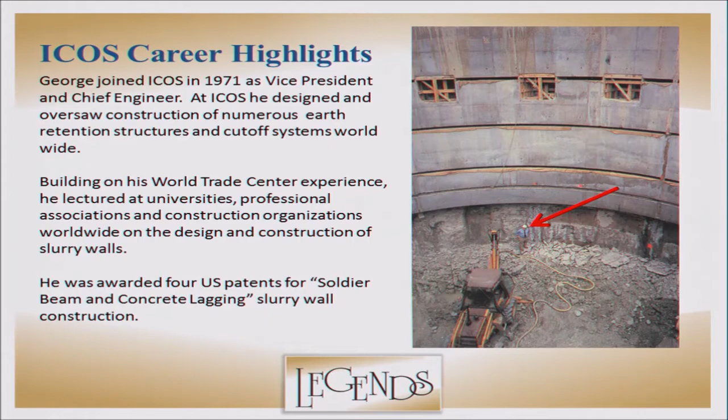Mueser Rutledge Consulting Engineers. George joined Mueser Rutledge Consulting Engineers in 1980 and was elected to the partnership in 1983. He focused his attention on the design and construction of deep foundations and excavations. His first assignment was the design and construction of the 4-building World Financial Center with 2 basements mimicking the World Trade Center bathtub just across the street.

His other projects ranged from Egypt to Frankfurt to Berlin to Mexico City. While his projects ranged all over the world, he will be remembered for his work on the World Trade Center below-grade recovery effort after 9/11.

Achievements that George has attained. He's a registered professional engineer in 16 states, the UK, and Europe. He's elected to the National Academy of Engineering. He has the Mole's Outstanding Achievement in Construction Award. He's received the DFI Distinguished Service Award, the Golden Beaver Award, the AAES John Fritz Medal. He's an ASCE honorary member. He's gotten the ASCE Opal Award, the ASCE CAP, Peck, Balcom, Friedman, and Howard Awards. No shortage of awards.

George authored or co-authored over 75 works, including a recent revision to the New York City Building Code Foundation section, earlier versions of the Post-Tensioning Institute tieback standards, as well as book chapters on foundation engineering, caissons, and slurry walls. He has appeared on the cover of Ground Engineering and is in an Esquire magazine article. He was fully clothed for the article.

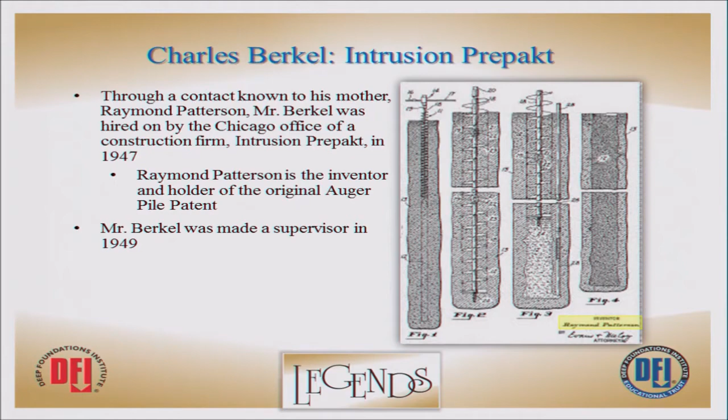At the time, he was working as a junior engineer for the city of Muskegon. That wasn't really what his goal in life was. He was looking for something more than that. His mother knew a friend that had just let an apartment to a man by the name of Mr. Raymond Patterson. Mr. Patterson worked for a construction firm called Intrusion Prepakt in Chicago, and they suggested maybe that he might go visit with him about possible employment. Interesting enough, Mr. Patterson is the inventor of the original auger pile patent done in the early 1950s. As you look at this patent, you might note about the third one over, there's this grout pipe that sticks down there. Later on, I will show you something that relates to that. Mr. Berkel was made a supervisor at Prepakt in 1949.

He traveled a lot to the Midwest, doing a lot of work in the Kansas City area. After the Great Flood in Kansas City in 1951, he was transferred there, Prepakt opened an office up there, and he became the regional manager. This is a newspaper article we found announcing his promotion and Prepakt opening a regional office in Kansas City.

Most of the work back in those days was pressure grouting and pre-placed aggregate concrete, which was concrete repair, and there was a lot of this work that stemmed out of the flood-related repairs in the Kansas City area. He also developed quite a clientele with the different railroads around the country.

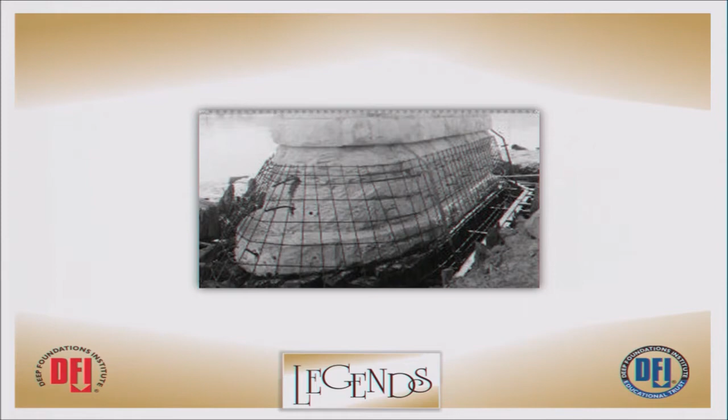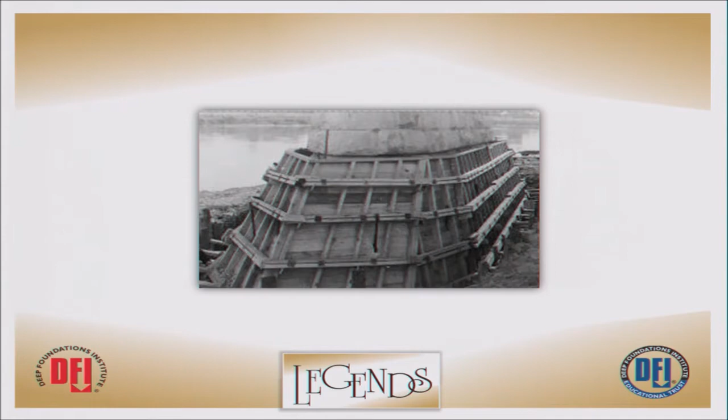We have some photos here of pre-placed aggregate concrete, because maybe a lot of people don't know quite what that was. This is one of a bridge pier, a railroad bridge pier, and the bottom part of the bridge pier had eroded away due to water wear, whatever, and so the process was to chip this back to good concrete, and then you would go in and place the steel around it.

Watertight forms would be built around to form it, and the forms would be filled with rock, a well-graded, washed rock, and grout pipes would be left in place, and then a cement grout would be pumped through these pipes, and this created a very durable, long-lasting concrete. And there was a lot of this work done on railroad bridge piers, spillways, dam spillways that had a lot of water wear.

And that was a big part of Prepakt's business, as well as when Mr. Berkel started, a big part of his, along with pressure grouting and soil stabilization.

While he was living in Chicago, he met Antoinette Strauss, better known to all of us as Tony, and they were married in June of 1948. Over the years, Mr. Berkel and Tony adopted 4 children: Danny, Glory, Stephen, and Danielle. Tragically, Danny was taken from them in a car accident in 1968.

Children weren't the only thing that the Berkels had. They raised longhorn cattle for a while, which probably seems odd if people knew him, but they raised them, and I think all the cows had names too, and all of that, and that went on for quite a few years. They had about 40 acres there in the country.

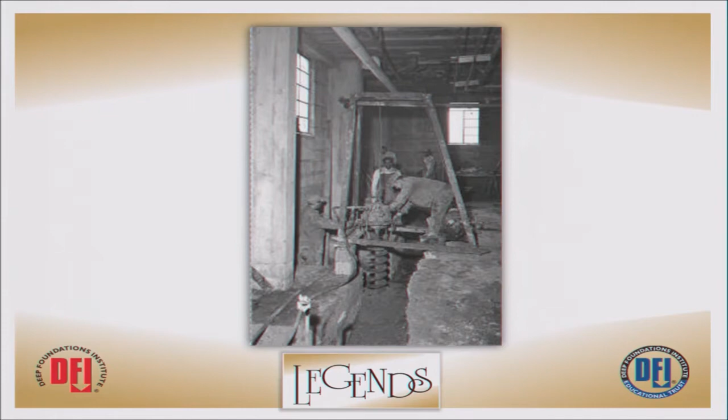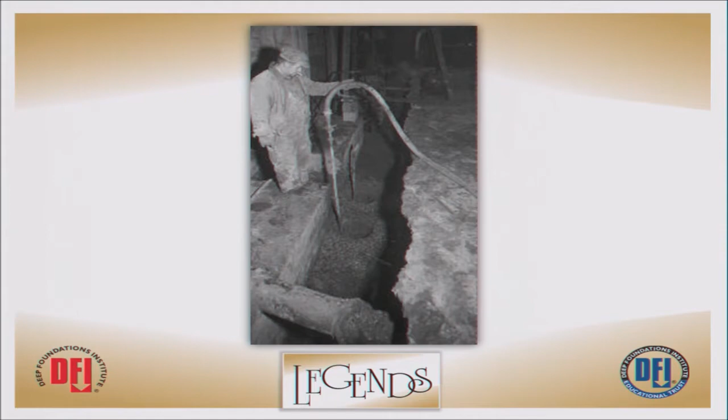This is a picture of an early auger pile. I would say this is an Intrusion Prepakt picture. You can see they're using an air motor on a frame to drill the piles down. And here you can see the grout pipes. The pipes were actually along the auger - that was the original patent of drilling it down, putting the grout pipe along the pile, and then pumping the grout as you pulled the auger out.

Along the way, Mr. Patterson said maybe we should drill a hole through that hollow or solid core auger that we have, and we could pump that grout through there - and therein lies how that process was created.

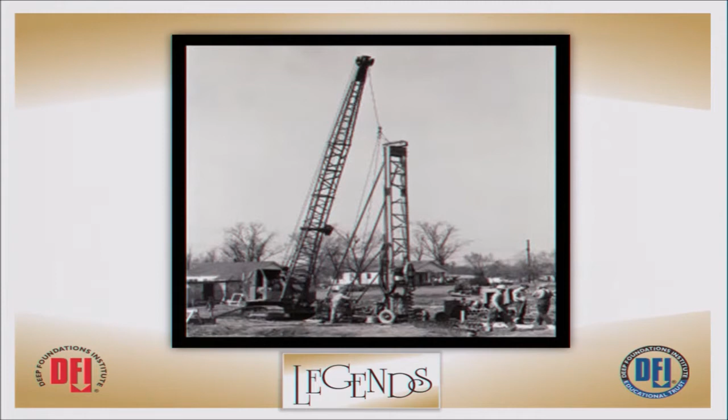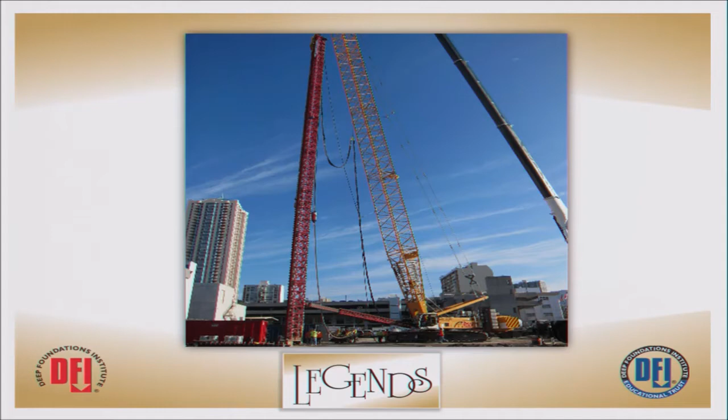Compare that to our hanging lead system that we have today. So this industry has come a long, long way.

What we do as a company: we do deep foundations, auger pressure grouted piles, displacement piles, drilled shafts, rock anchors, tie downs, sheeting and shoring, and ground improvement. If there's any questions about what we do, go by our booth - we'd be glad to talk to you.

Noteworthy projects - we were founded in '59, so we're 56 years old. We've truly done over 11,000 projects in our life. At some points in time, there were probably projects that were very noteworthy - the tallest building, the biggest parking garages - and today they've been surpassed, so now they're not as noteworthy.

So we tried to come up with something you all see on TV or walk through sometimes, in the way of stadiums and airports - the Georgia Dome, Turner Field, the Cleveland Browns Stadium, the Reds baseball stadium we did with Gettle, the 49ers Stadium here locally, just did a big part of the Falcons Stadium, and numerous renovations to other stadiums, along with a lot of college stadiums like Ohio State.

Airports - some of these we did the original work, some we did additions and renovations: Atlanta, Fort Myers, Orlando, Miami, San Francisco, Kansas City, Philadelphia, St. Louis, Greenville-Spartanburg, Love Field in Dallas, and Pittsburgh. A couple more I thought about - we have done some work in San Diego Airport also.

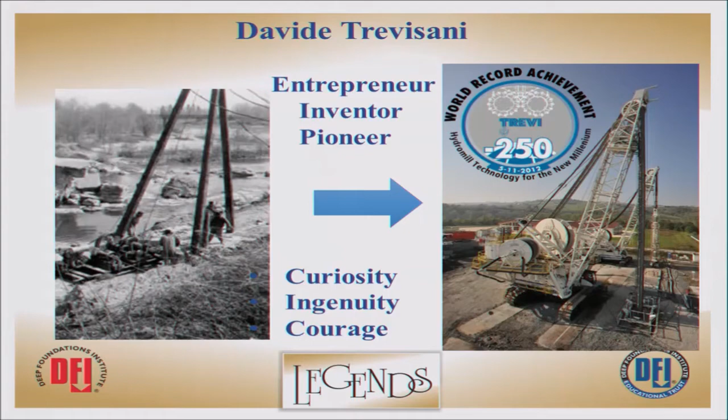So Davide started his early life in Cesena. This is where the head office of Trevi Group is, in 1937. This is a special region in Italy where a lot of activity in engineering and machinery is concentrated within a distance of a few kilometers. Many famous brand names in the world, in the automotive industries, belong to this area. So there is a very strong background in this region.

1962, he got married - my mom is here. And they had 4 children: Stefano, Monica, Alessandra, and Simone. Very old pictures, 1993 - long, a few pounds ago, I will say.

So Davide started the company. In 1956, he got his high school degree as a surveyor, and in 1957, he was working on a job site as a surveyor. On this job site, not far from our head office today, there was piling activity with one of these tripods. So he basically measured what the margin was in this activity, and he decided to start the idea of being a piling contractor. He was 20, with no money - the family borrowed money with a loan of $450 with a guarantee from his father, friends as collateral.

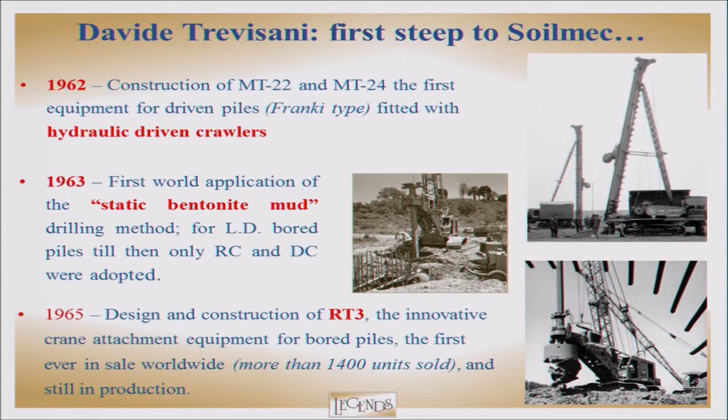One of the first hydraulic crawler-driven pile equipments ever seen in Italy, and the first crane attachment built in Italy, called RT3, one of the most famous piling rigs around the world still today. Maybe later we'll tell more about the concept behind these rigs. Soilmec was established in 1969 as a separate plant from Trevi, and started to sell equipment to Trevi's competitors in Europe, in Italy, but also elsewhere in Europe.

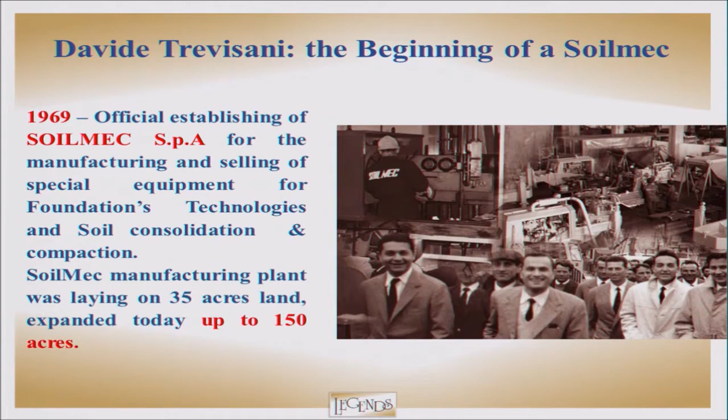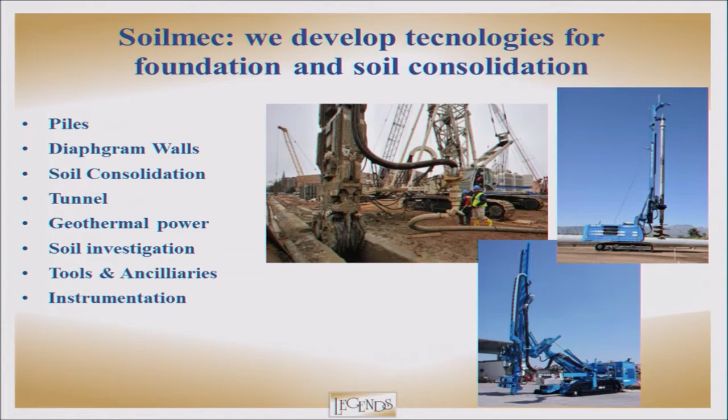A lot of innovation, a lot of research, always this strong passion and enthusiasm for technologies. Basically, Soilmec grew to be able to supply today the full range of machinery for deep foundation activities. Some of the special or noteworthy projects came from demand from a job site Trevi was doing, so they built this special triple clamshell as a special application.

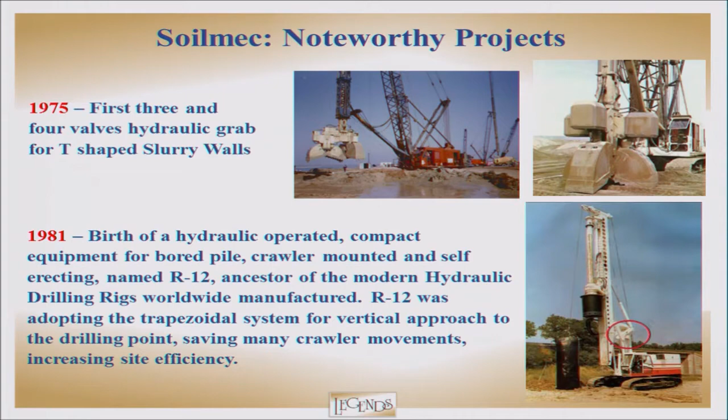In 1981, one of the major developments in piling activity: this small equipment was actually the first self-erecting hydraulic rig, which today, unfortunately I forgot to patent this, is the most common piling rig system around the world.

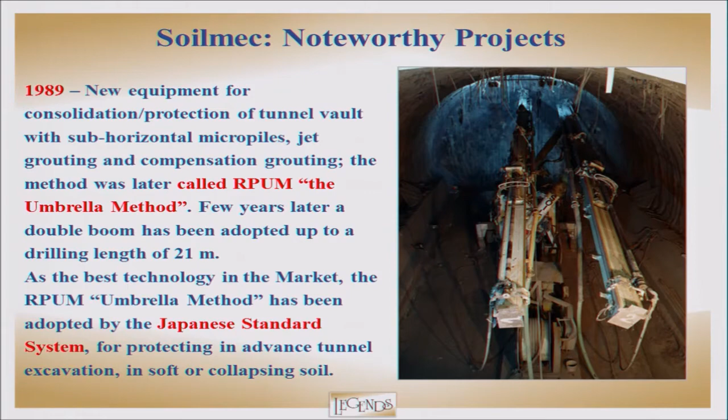Again, application in special geotechnical works, in this case for tunneling. We're talking about forepoling and jet grouting or drilling grouting activity, with this special double boom equipment that was widely used in many countries, including Japan, for many, many years.

More noteworthy projects: in 1992, he designed the first trencher to build continuous slurry walls for several applications. And around 2000 to 2005, what is called the DMS, a computerized controlling system that monitors from a remote control room all the activity - drilling, excavation - as well as quality control for equipment.

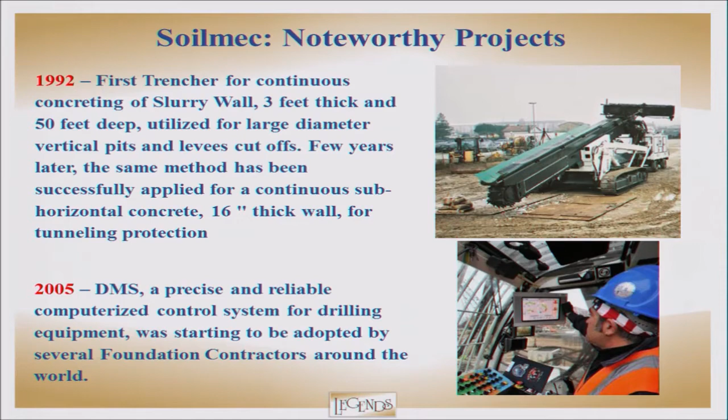Also, in 2006 was the first case of the secant pile with hydraulic rotary drilling. After the acquisition of Rodio in 2005, actually in 2008, he started to develop this idea of the hydraulic hydromill.

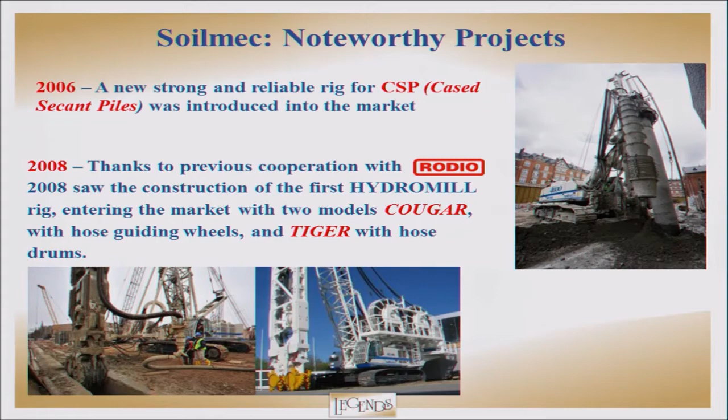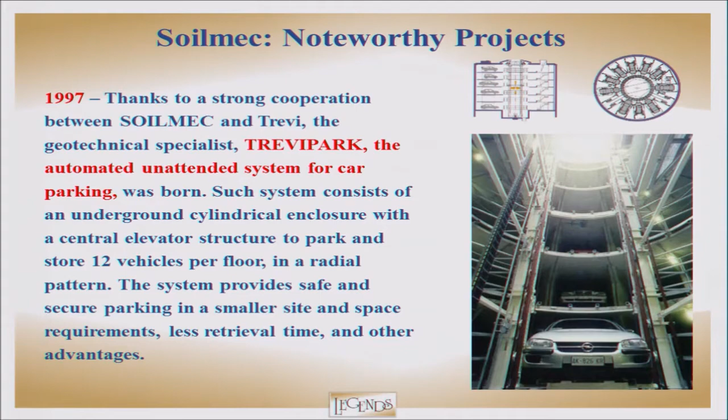A full line of heavy-duty cranes, the full range of cranes and equipment for the foundation industry. Again, this special application of machinery knowledge and engineering: he designed the Trevipark, an automatic underground car park, using the same system he was developing for Soilmec, as well as the same remote control system we talked about before.

And again, we reached these records in 2012: a world record of about 830 feet for a hydromill excavation. When we talk about a record, it means this very strong passion for something new to explore, something new to develop, with a lot of question marks before you start, but with a good solution at the end of the process.

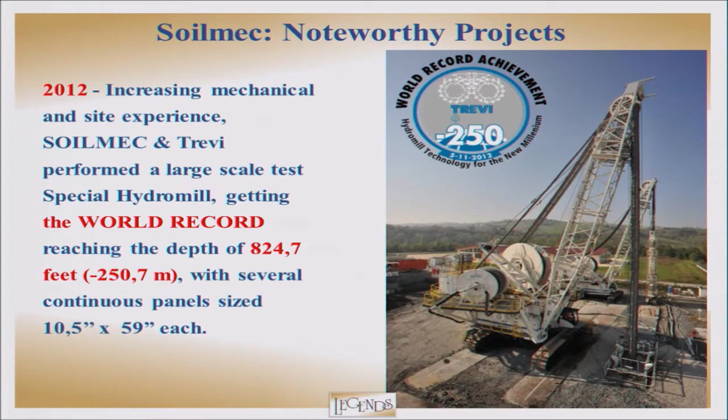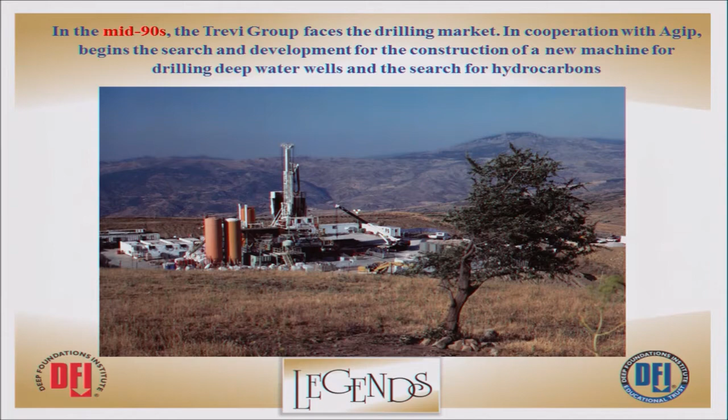It's worth mentioning that this engineering attitude was also applied by Soilmec to the oil industry - a very unusual passage. Worldwide, the oil and gas industry is considered at the top level in developing technologies. What happened was he designed this equipment together with the design department, where Soilmec's experience of so many years of hydraulic application was turned into new hydraulic rigs for oil and gas drilling and exploration activity.

And in 1992, DrillMec was founded, and today DrillMec is the largest European manufacturer for this type of application.

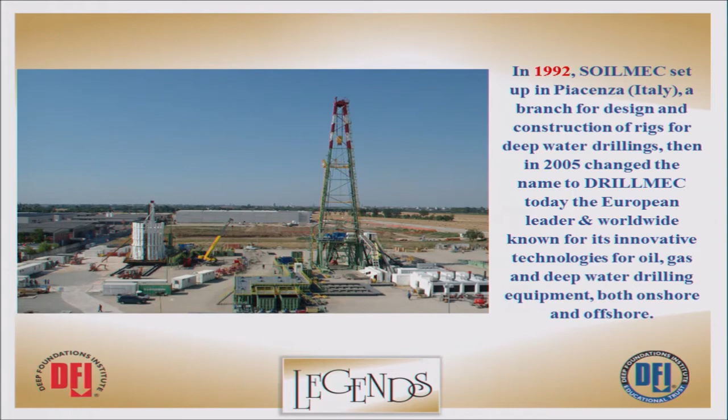Again, this picture here shows what the hydraulic rigs developed by Drillmec look like.

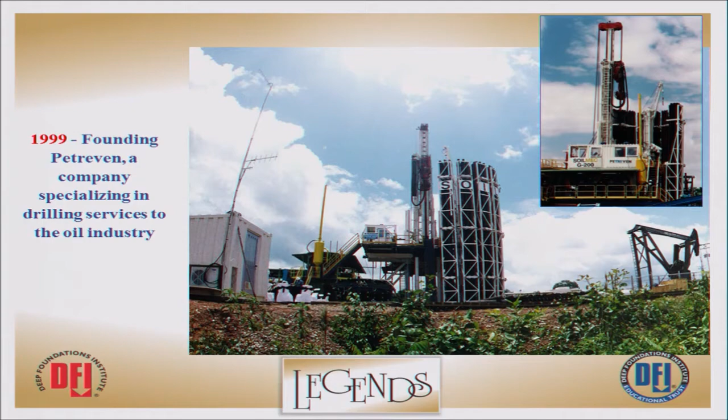In 2010 he was nominated and won the award as Entrepreneur of the Year for industrial activity in Italy, and again became an emeritus member of the Italian Geotechnical Association in 2012.

He had a lot of activity starting in 1977 related to banking. He was president from 1977 to 2011 of a local bank in Italy, for 34 years, with a strong contribution from his experience to the local community. It was all done on a voluntary basis, combining 34 years of activity in Trevi Group with 34 years of activities as a banker. Not an easy thing for sure.